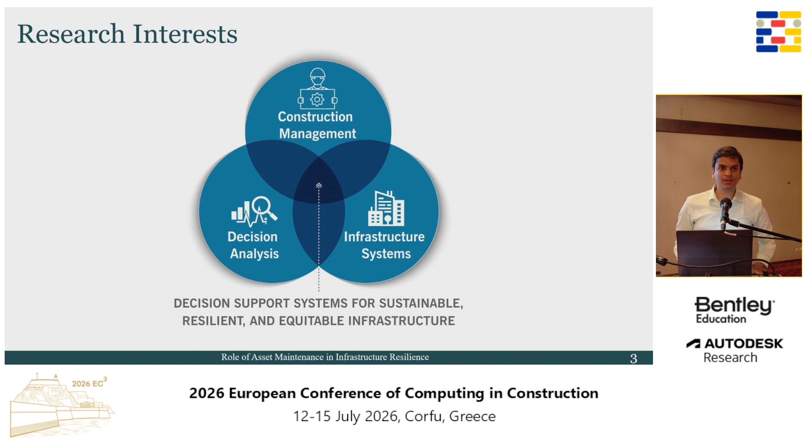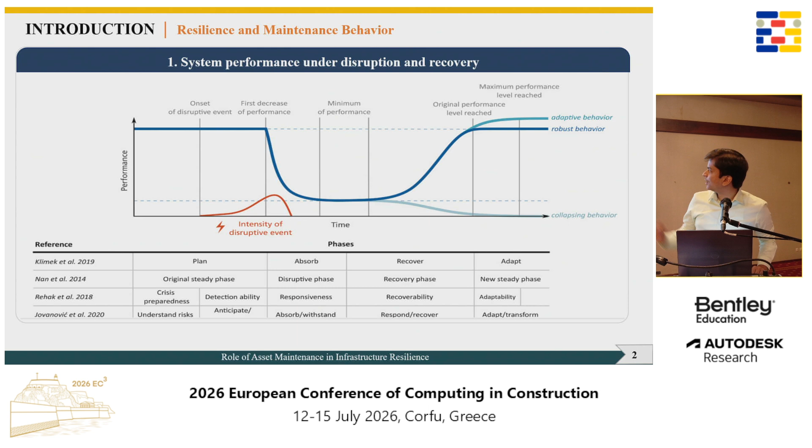So what we're saying is that in resilience, we often call it a straight line and say that whenever there is a hazard, it will go down. But in asset maintenance, we're used to seeing a curve, where the asset actually deteriorates with time. So what we're trying to study in this research is the role of asset maintenance in having a resilient infrastructure system.

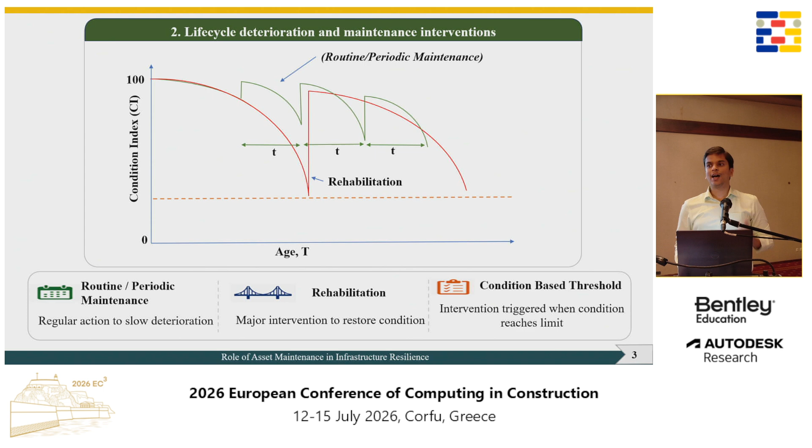The research gap is quite clear: most available works consider the performance prior to the event to be a straight line, but that is not true. Maintenance actually has a role in the pavement condition, the bridge condition, or the end condition of any building. Also, a lot of this work is generally done post-hazard, but there is always a linkage between what we do pre-war and post-war, if I call the event as war.

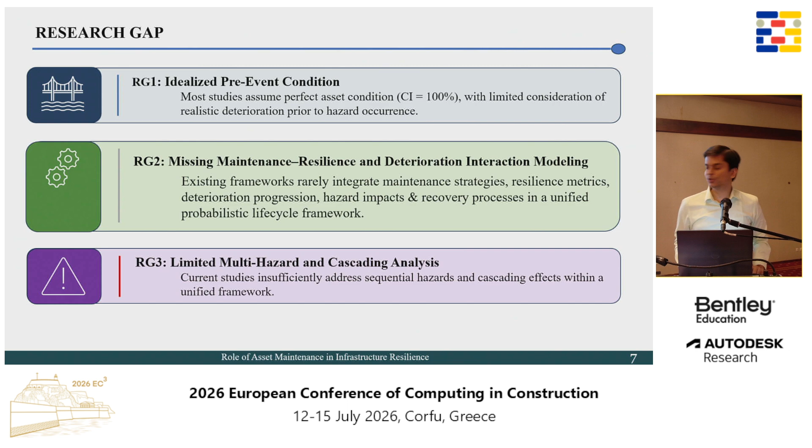So accordingly, the way we developed this is we created a model of a bridge. We tried to mimic it, considering that the initial condition is say 100. In that simulation model, we created a deterioration profile for how the asset will deteriorate over time. We also created a simulation profile for the hazard, how it is likely to impact, and if there is a hazard, there will be damage - so we tried to model it.

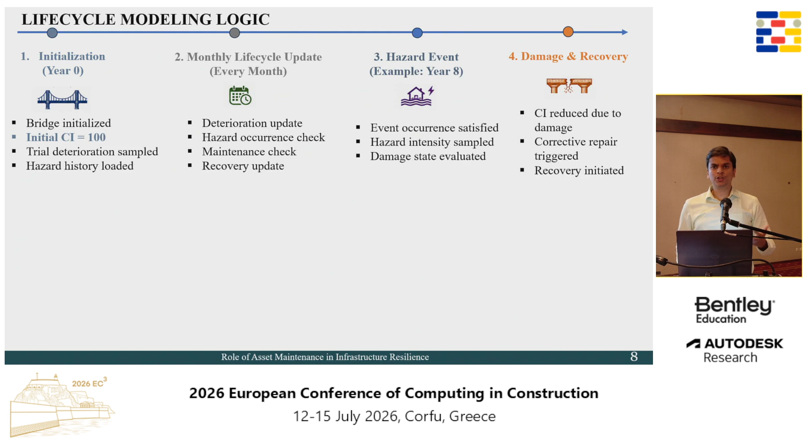Also, we tried to model the maintenance actions we have to take before the event. We modeled additional hazards - cascading hazards - which are very common in any challenging terrain. For example, if there is flooding, it can lead to a landslide. So there is a cascading effect of hazards, and we tried to model that, and then we tried to see how the performance changes over time.

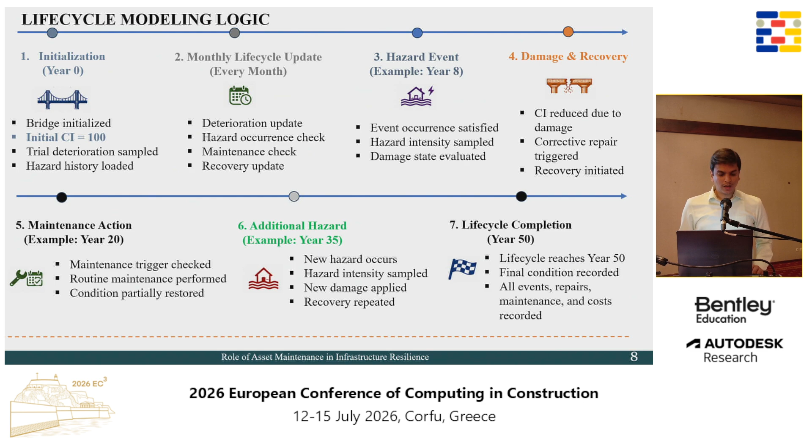I'll talk more specifically about the different maintenance strategies we studied. We studied three types: one is if I don't do any maintenance; second is if I do routine maintenance every 5 years or every 10 years; and third is rehabilitation, that is, I do maintenance only if the condition of the asset goes below a threshold. Please remember, these maintenance strategies are before the event - before any hazard.

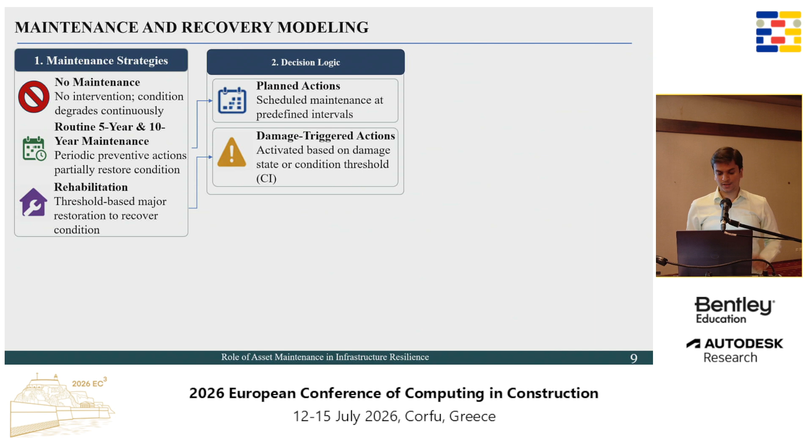We tried to see: if I keep the infrastructure maintained and it undergoes a hazard, versus if I don't do anything to the infrastructure and it goes under a hazard, what happens? So we updated our profiles - the idea is that whenever I do maintenance, the condition is expected to improve, and if the condition is better, the deterioration when a hazard occurs will be less. So we modeled all of this: maintenance, how it leads to improvement in condition index, how it shifts the fragility or vulnerability, the potential reduction, and how it can lead to higher resilience.

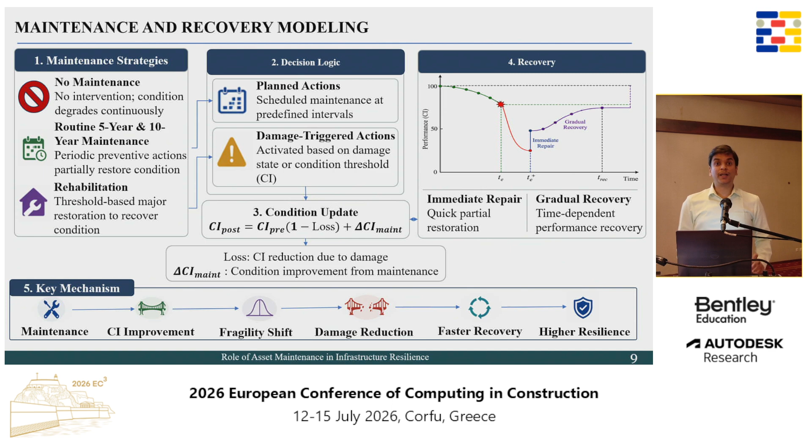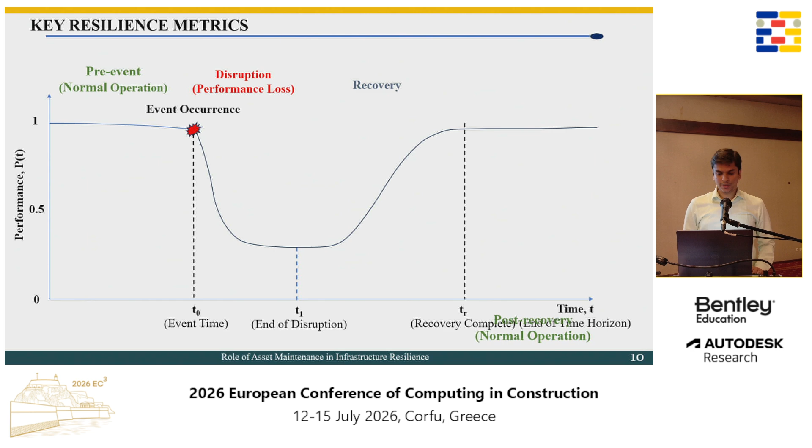The metric I used for analysis is a common one from the literature: pre-event you have a curve, then disruption, recovery, and so on. We're already aware of the 4 Rs: robustness, which is how much the infrastructure goes down; rapidity, how quickly we bring it back; recoverability, the maximum level I can recover it to; and finally the area under the curve, known as the Composite Resilience Performance Index.

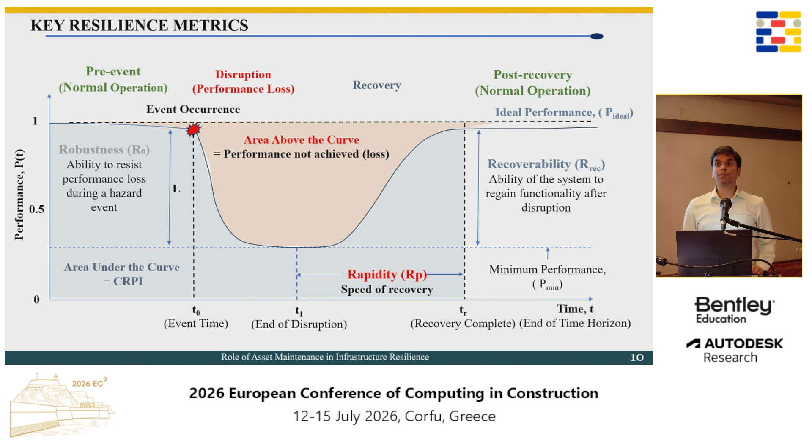This area under the curve is a very good representative measure. If my infrastructure recovers back quickly, the CRPI will be very high because the blue shaded area will be large. But if it takes a lot of time, or collapses, this area will be less. I used a simple metric because my goal was to translate how asset maintenance plays a role in resilience.

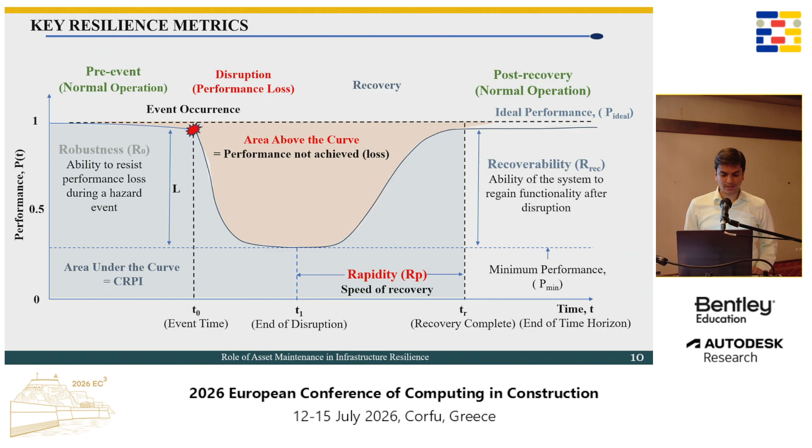Moving on, I'll show some results. The baseline case was zero maintenance, meaning we only do corrective repairs if there's a hazard. Here, the CRPI, the Composite Resilience Performance Index, came out to 0.529. That's the baseline number, which we'll compare with other maintenance strategies.

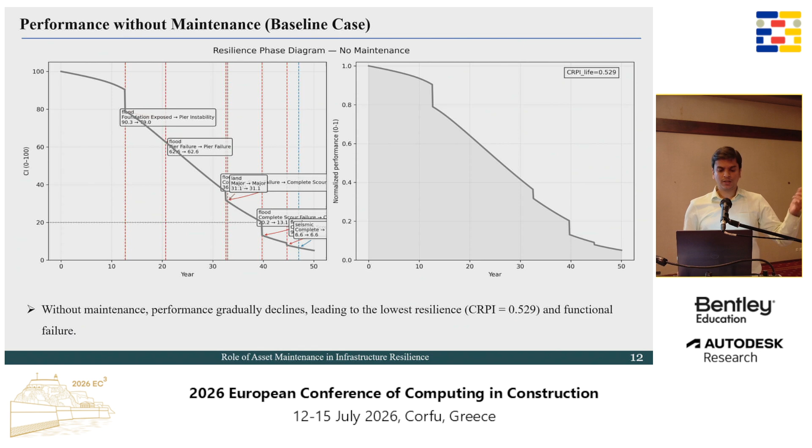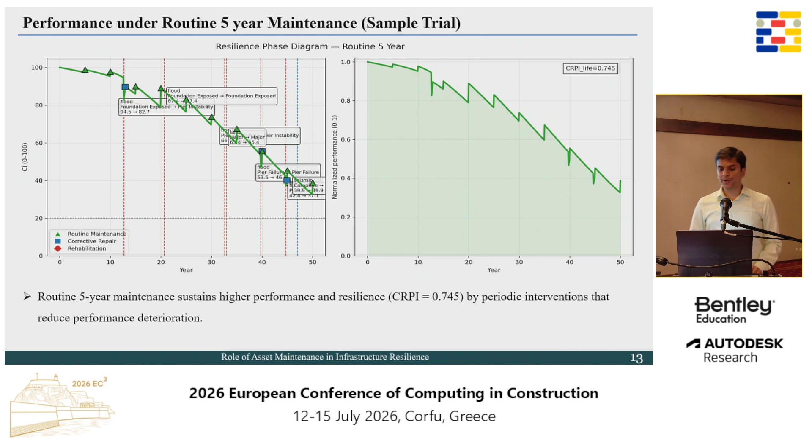For routine maintenance every fifth year, using the same hazard profile in a Monte Carlo simulation with thousands of different simulation profiles, the CRPI actually increases to 0.745.

Comparing different maintenance strategies—5-year, 10-year, and rehabilitation—you can see the box plot here, with CRPI on the y-axis. No maintenance often has the lowest CRPI values, and routine 5-year has the highest. Even rehabilitation had a very high CRPI score, but when we compared the cost, it was almost 2 times the life cycle cost.

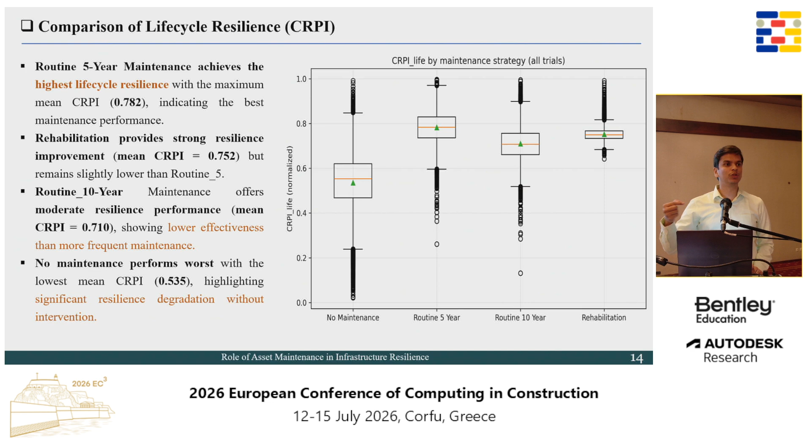So we compared doing preventive maintenance versus only rehabilitation, that is, waiting until the asset actually goes below a certain threshold. It made more sense to do preventive maintenance.

On similar lines, for our small case study, we had numbers showing the money spent for pre-event, post-event, and overall. This is useful because people on the public or government side often want to see the return on doing this. Through this work, we could communicate that by spending $1 on asset maintenance, you're actually saving this much in the event a hazard occurs over the next 25 or 30 years. Obviously the chance of a hazard is always variable.

One could always argue that there is no hazard, but we could still talk about this as a resilience dividend in terms of doing asset maintenance.

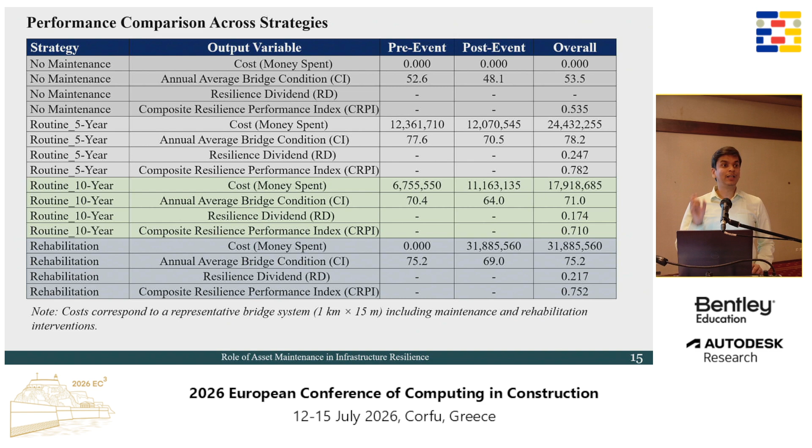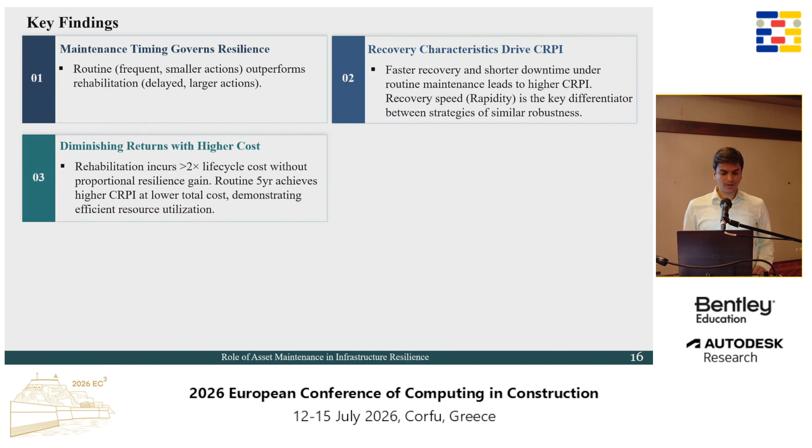So the key findings are that maintenance timing actually governs resilience. The resilience community often talks about reducing or improving robustness, or reducing performance loss, but we should also think about how to maintain our assets during normal times to improve resilience. Also, recovery characteristics depend on what type of maintenance strategy we follow, and there are always diminishing returns if we only do rehabilitation or corrective repairs.

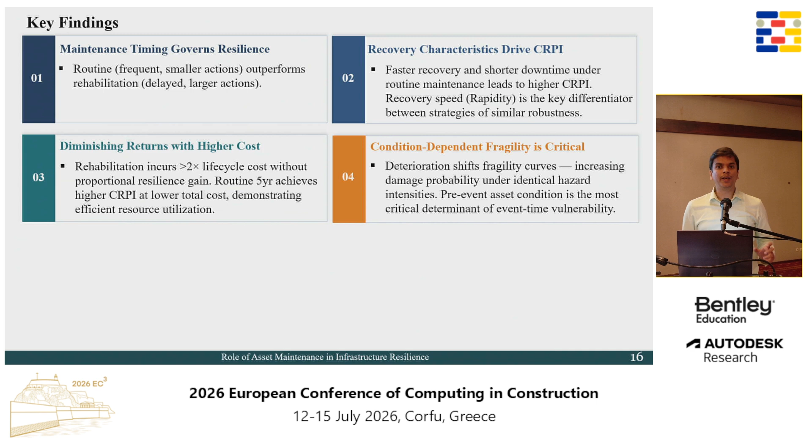Also, condition-dependent fragility is crucial. There are cases in infrastructure where if you don't maintain it and a hazard like an earthquake occurs, it will collapse with no chance of recovery. So there are decision implications. We've created a framework that can be used for different cases. For our case, we used a small case study of a bridge, but the framework is generally applicable across different infrastructure systems.

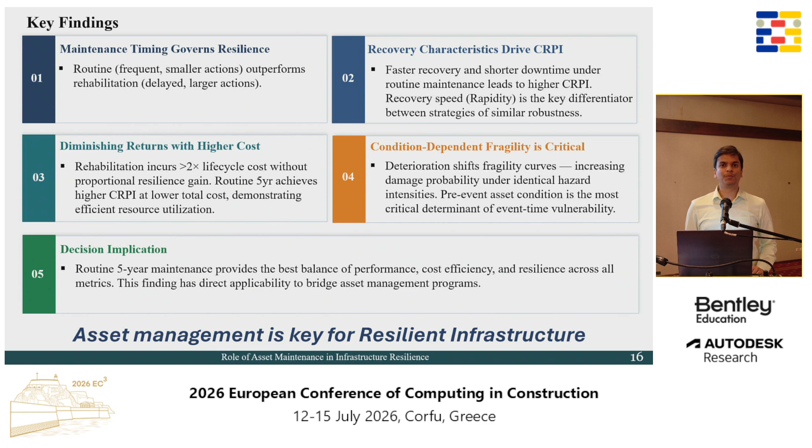One message I want to leave you with is that we need to figure out ways of communicating why asset maintenance is important. Unless we really measure it, we don't have ways to improve it. This is one way of quantifying it—that asset maintenance has a role in resilience. I'm sure it also has a role in sustainability, and for sure a role in performance. So we should try to quantify that and take that message forward. Thank you.